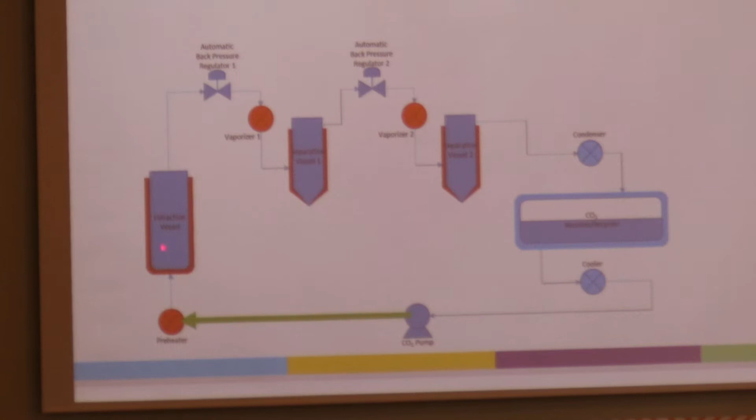Okay, here goes. Through this pump, with high pressure, we operate at pressures of 270 bars. That's about 4,000 psi, just to give you an idea. And so we pump this gas with a very high pressure through the vessel where the biomass sits in,

and then with the biomass, you dissolve the CBD oil or the cannabinoids. You put it into solution, and then you have to imagine it's like a gas. You go over to a vaporizer and you change pressure and temperature, and it releases the oil. That's the trick. So it's just by changing gas temperature and pressure, it releases the oil, and we have here

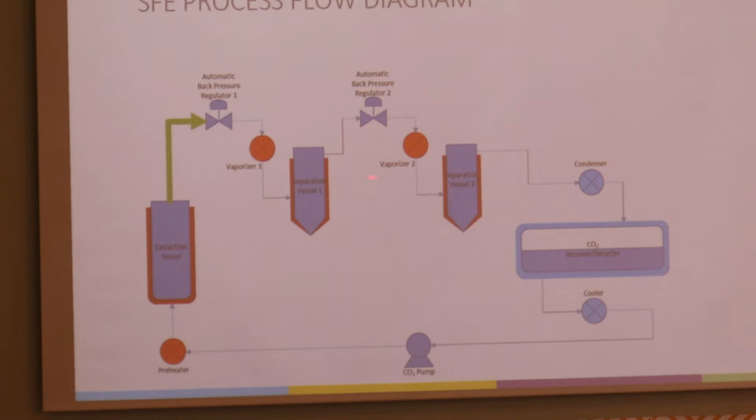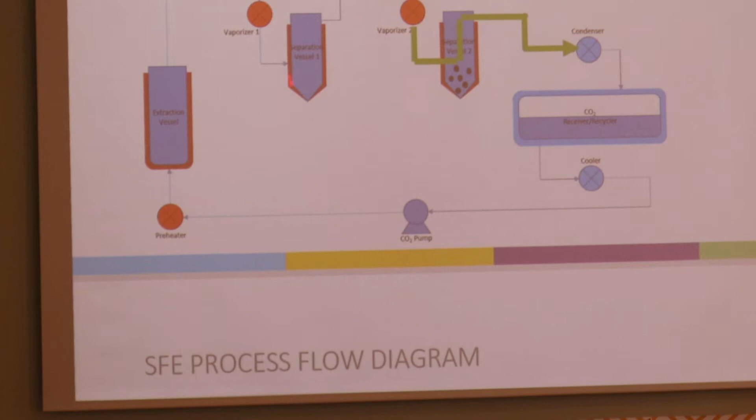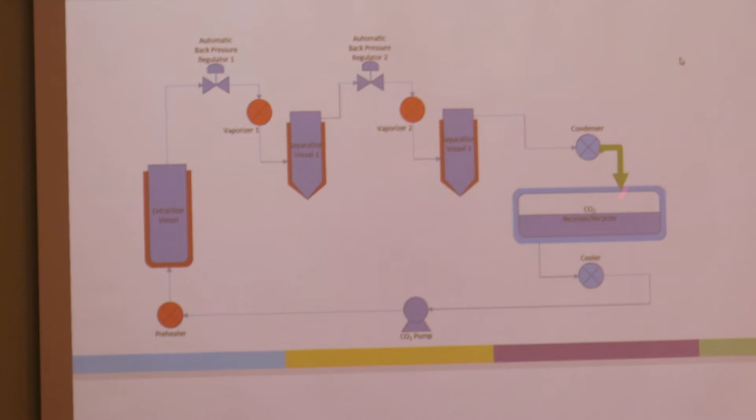a light fraction, and then we have a so-called heavy fraction, and then it releases the different cannabinoids and terpenes, depending on how you have set it up, and then it goes back into the condenser and back in the receiver tank, and it goes around again. So it is a fairly simple process.

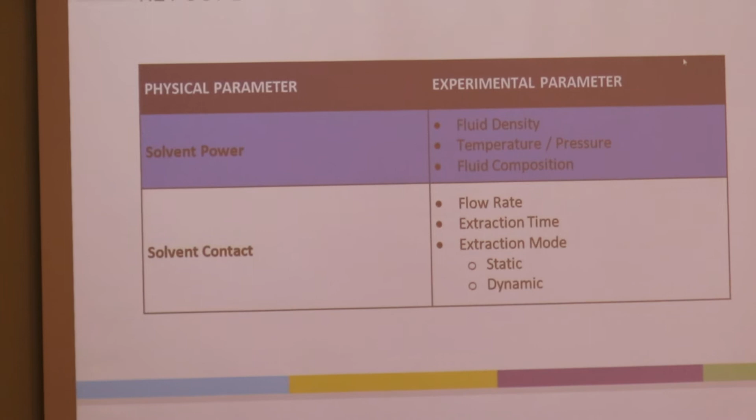The beauty of it is, and that's what differentiates us from ethanol or other mediums you can extract with, it is very precise. You can very precisely dial in parameters of collecting and releasing cannabinoids. And I will address this later in more detail because it makes a difference, especially for those plants coming.

You know, this is just the beginning. The CBD we have today, the CBG, which we planted last year, and the plants which are coming next year require an ongoing adjustment of the parameters. Otherwise, you leave money on the table. Otherwise, you cannot dial in what you want to have.

And this is the uniqueness of our machine with our process, that we can dial in and change the solvent power and the penetration time very precisely by changing the temperature or the pressure or the flow rate, extraction time. And I will give you a couple of examples later of what we can do with this.

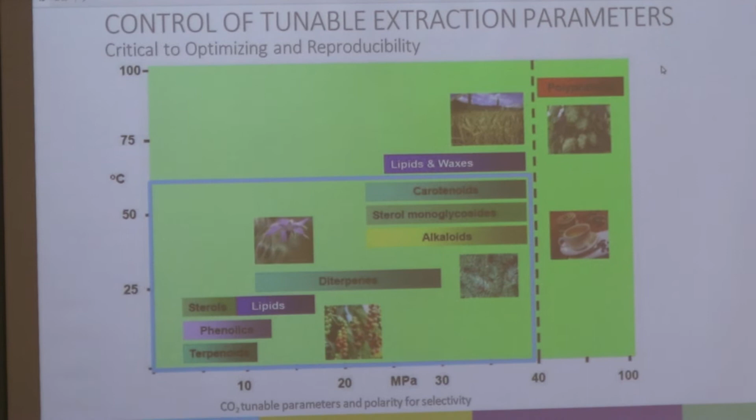And here you can see it. By changing pressure, this is MPa, I'm sorry about this. This is 300 bars, this is about 4,000 psi, just to give you an idea. And this is Celsius, so this is 50 Celsius, it's above 120 F. So this is the window we are operating in.

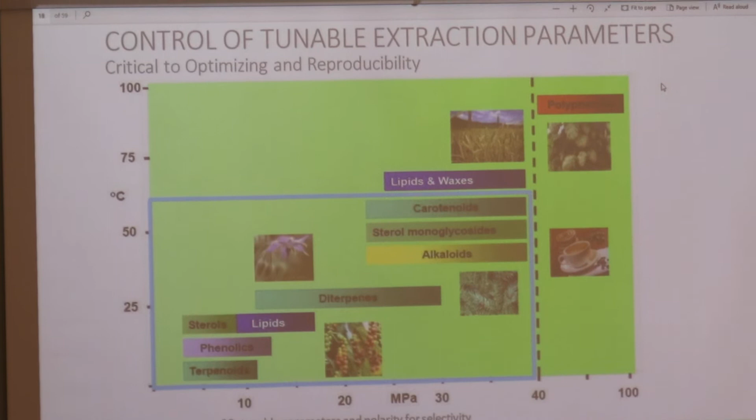So supercritical CO2 extraction has been done for 30 years with all kinds of biomaterial, used very much for hops. Very much established for hops. And it is very established and used for lavender and decaffeinating coffee, right? So there's a lot of use for supercritical extraction. So there is nothing fancy, nothing new. It is a very proven process.

And more so, and that is important also looking forward, it is a process which is commonly used in the pharmaceutical industry. So it is a proven, established process, and you can dial it in to extract those exact lipids or the cannabinoids or what you exactly want. You can dial in what you like to put into solution and when and what you like to release. It's called fractionation. We are actually working in a smaller window than this, but this should just give you the idea about the possibilities.

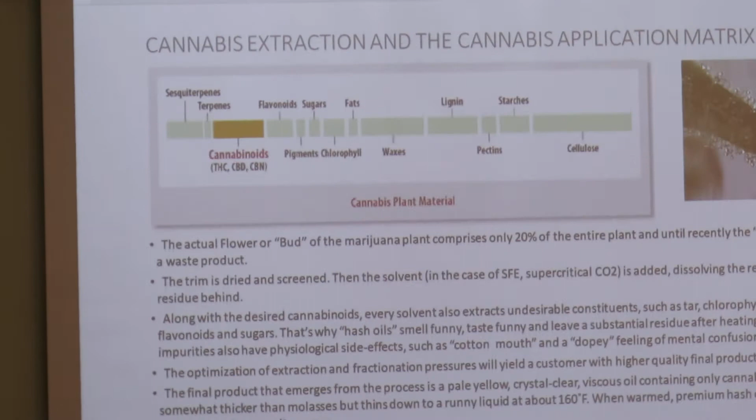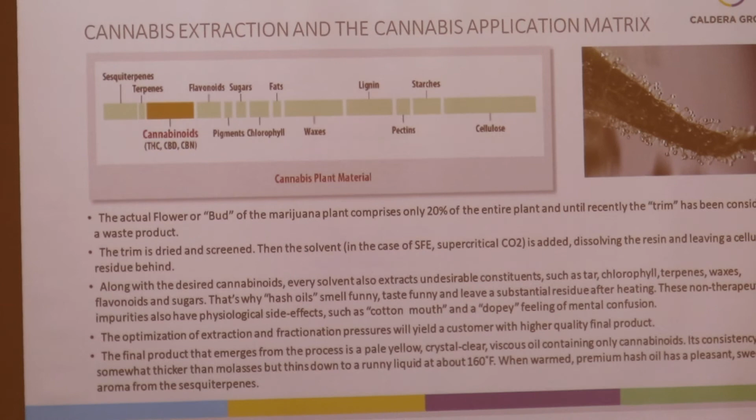And here you have this applied to hemp, and you see this is the entire ingredient of a plant. And there's a lot of stuff you don't want, and a little bit you want. As a matter of fact, the trichomes. This is what you want, but you're cutting, as my friend Eric always says, the whole tree to get the apples. And the apples are the trichomes here. This is what we want, but it's too difficult to pick them by themselves.

So we take the whole plant and chop it up, and then we have to fight with the rest and need to separate it in a way that we only get terpenes and cannabinoids. And that's what we can do with supercritical CO2, that we get exactly only this out. So, as said, we can chop up the whole plant, that's how it looks, but we need to grind it, and the better the intake, of course, the better the outcome. So if we put in a ratio